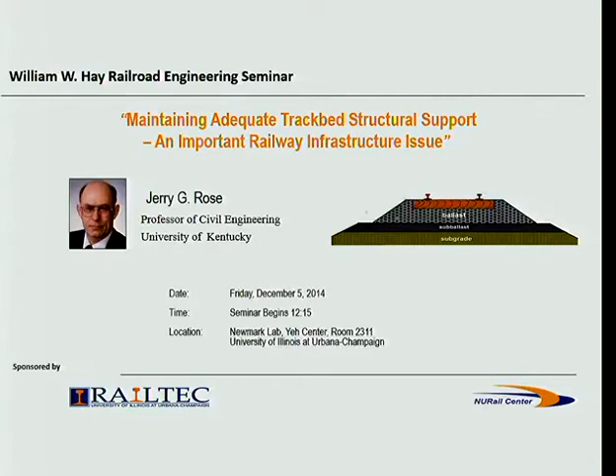I asked him to autograph my textbook. This was $37.50, the bookstore price. I should have bought several for investment, but I didn't. I added the date to it there, but I've always appreciated his...

It's really unfortunate in some respect for you young folks to not have had the opportunity to meet him, because not only was he a nice fellow, nice person, but he was a very interesting person to talk to, and a lot of that was based on his experience, which he had done about everything you can imagine in the railroad industry, on the engineering side.

He was quite an inspiration to many people. He sort of kept the torch burning. As you know, in the 1950s and 60s, the railroads were pretty well on a downswing, at least in hiring engineering folks. But in the 70s and 80s, with the 3R Act and the 4R Act and Staggers Act and so forth, he also saw the upswing, which we're still in, of the industry. So that was his contribution there.

But with him, the railroad industry was number one, and you weren't with him very long until you realized that.

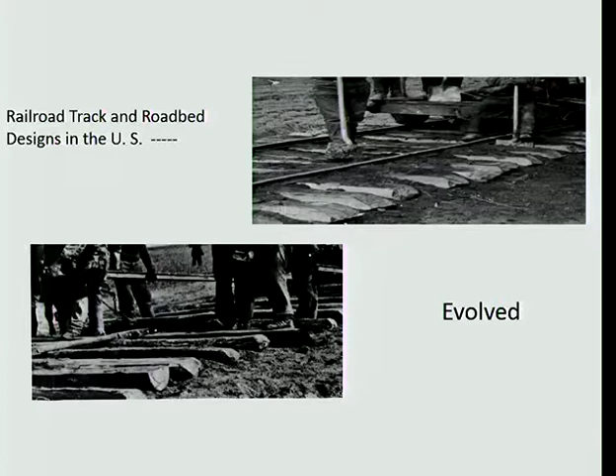Initially, railroads in this country were pretty well just built on the natural ground, and if you were in an area that had fairly stable soils, the more granular soils, probably the performance was a little bit better. If you're in the clay soils, probably not so good, particularly in wet weather. But our track bed system for most of the mileage in this country really developed in the 1800s, well before the highway industry, which really didn't develop very much until around 1910. So up until that time, the railroads were the dominant form of transportation and led in the development of these sorts of things.

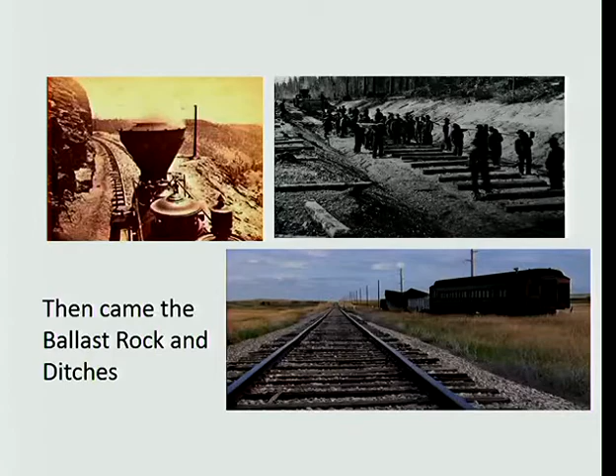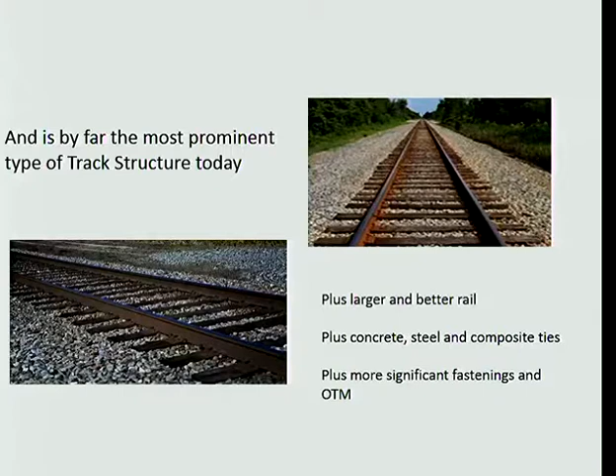So basically the track was laid on the natural ground, and that's pretty well what you had. Then later came ballast rock. It was pretty obvious that if they added some more granular material, ballast-sized materials in and around the ties and under the ties, and gave attention to drainage with ditches and so forth, they would get even better performance. So the all-granular track bed, road bed, evolved from that. Today it's by far the most prominent type of track structure in this country and most other countries. Of course, a lot of advancements have been made - cleaner steel, bigger rail, better rail, plus concrete ties, other types of ties, improvements in fasteners, other track materials, as the industry has progressed.

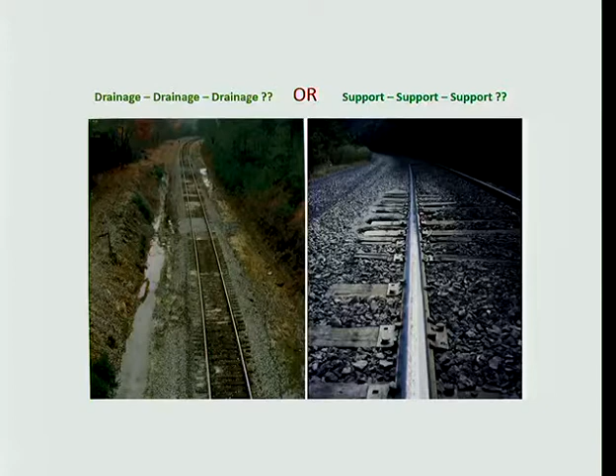Still, the problem of drainage exists. It's typically been said the three major problems with track are drainage, drainage, and drainage. It's interesting - I read an article in a 1927 issue of the L&N Employees magazine, written by a roadmaster, titled 'The Importance of Track Drainage.' His basic premise was that if we can maintain a hard pan, we can hold the track. That was the terminology at that time. I think what he was saying was that we can maintain the geometry to the level we need if we have proper support, or a hard pan, within the track structure. Obviously drainage assists in doing that, but the key really is support and providing the necessary drainage to make sure that support is maintained.

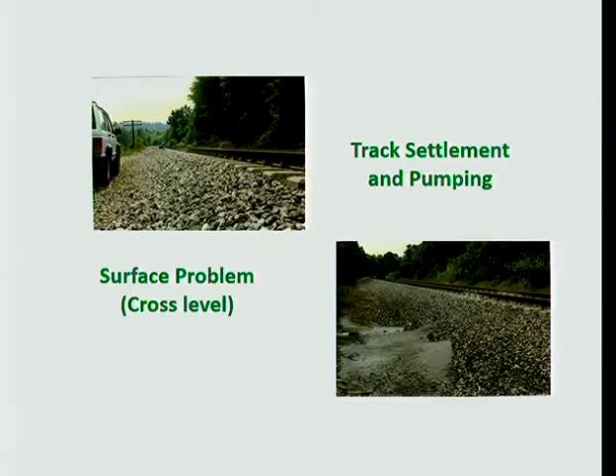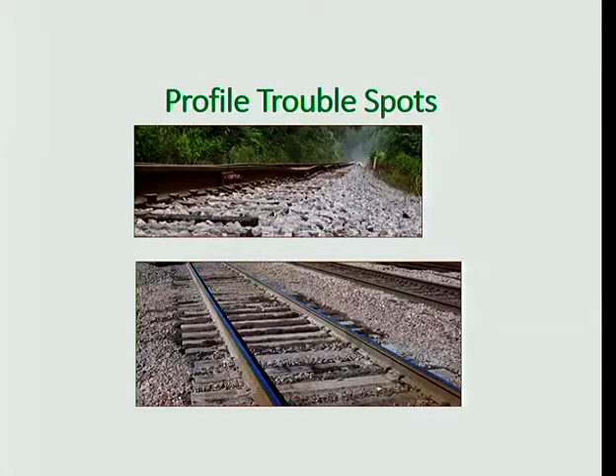Some of these are extremes, just to make a point, but periodically these things do happen. You get surface problems, cross level issues, track settles, pumps out. Obviously if all this material pumps out, the track has to drop, and you may get cross level problems as well as surface problems. Then profiles develop, and wear and tear of the ties, abrasion of the ballast and ties, increases as well. That's not something you want. These examples are not typical - they're not prevalent necessarily, but occasionally they do occur.

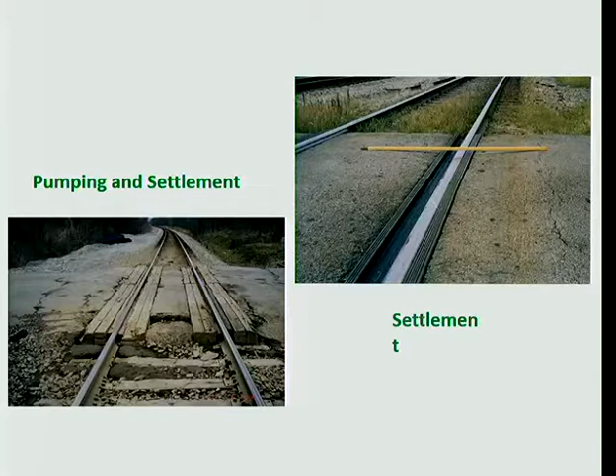Here's an example on a road crossing. The one on the left looks pretty bad - that picture was taken several years ago. But on the right, this crossing is just as rough for the driver as that one that doesn't look so good. You can actually see here the tension crack where the settlement has occurred. So this has settled, and that's just as rough really as the other one, although it looks better. But the problem here is settlement, no question about it, due to the truck loadings and the rail loadings and so forth.

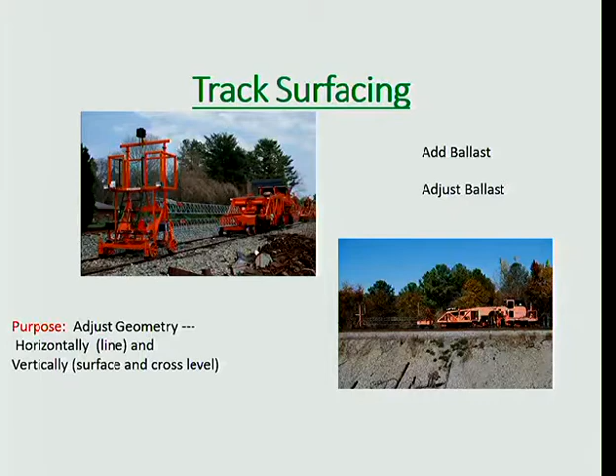So as you all know, the solution to all this is to come out and surface the track, add ballast, adjust the ballast. You're really adjusting the geometry to bring it back within the requirements prescribed for that particular class of track. That's a process that's repeated over and over - you bring the tampers out and consolidate, pull and push, and so forth until you get the track back to the required geometry.

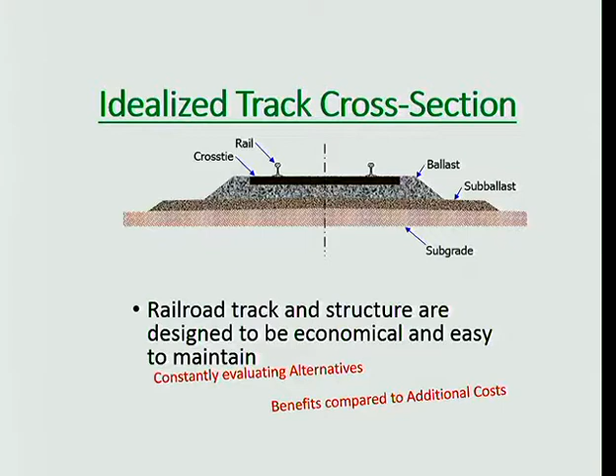The idealized track cross-section would look something like this, with components like the ballast and subgrade, typically designed to be economical and easy to maintain. Those are certainly desirable attributes. What the railroads are doing is constantly evaluating alternatives. Normally these alternatives are more expensive, and the question is whether or not the additional costs are justified. That's generally the bottom line in the final analysis, along with how much interference from operations is required for various solutions to certain problems.

Basic requirements, of course, it's a guideway and support the loadings. If you have a good quality track that maintains the geometry required for that class of track, then all these other things will be dictated by that track quality. Those are the ABCs of what you want.

It dictates the permissible wheel loadings, which is pretty well set, and the safe speed, trying to maintain the geometry over a period of time to minimize the amount of maintenance that has to be done. The overall safety is tied to speed and the dependability and efficiency of operations due to track work that inhibits train operations.

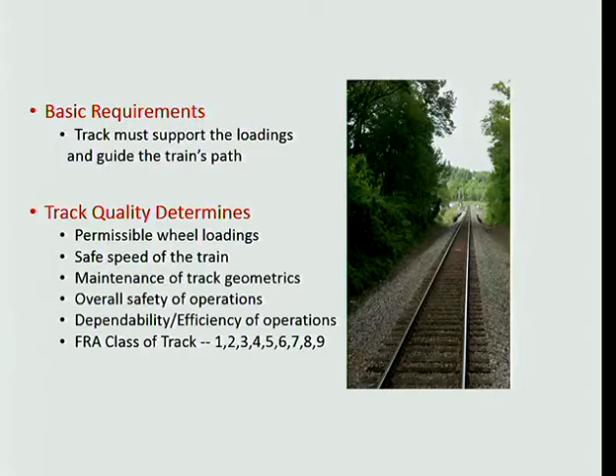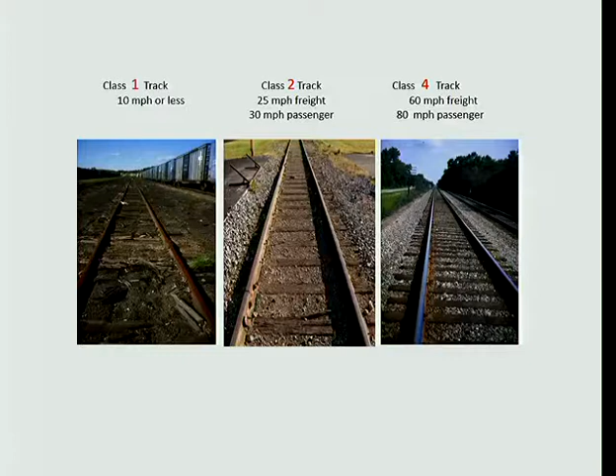So all of those are ultimately dictated by the quality of the track and how well it maintains its geometric features. Whether or not you've got a Class 1 track or a Class 4 on up to Class 9 will be dictated by the safe speed for those particular geometric features. So that's the way it goes.

Now, talk a little bit about the track functions. I have a number of notes here which I always forget to look at, to make sure I don't leave out anything. But let's talk a little bit about the track functions, and then we'll get down to the track bed.

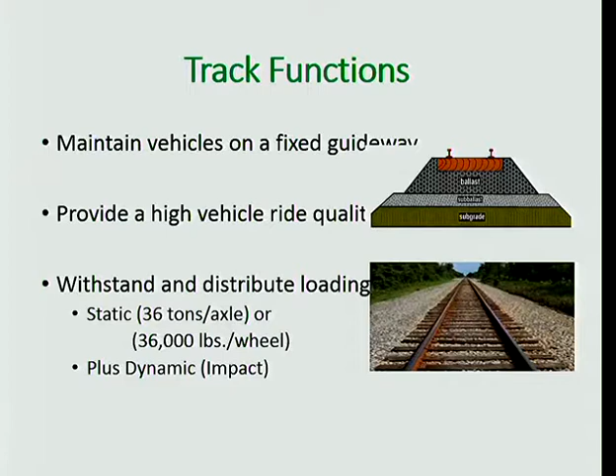Basically, maintain vehicles on a fixed guideway, provide a high level of vehicle ride quality, and withstand and distribute the loadings, as we've talked about. In this country, typically that's a 36-ton axle load that has to be accommodated, plus whatever dynamics that we have.

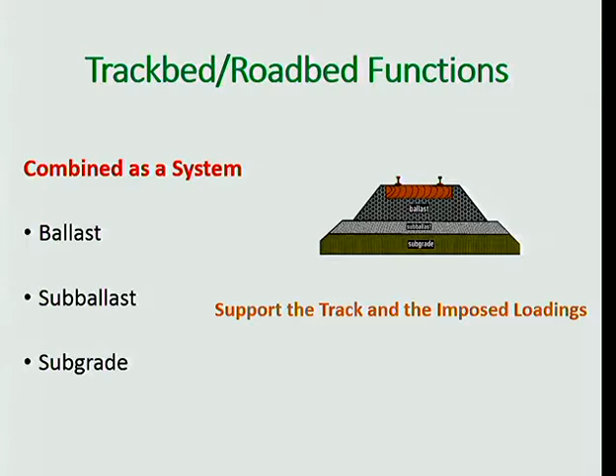Now the track bed, road bed, is a little bit different. This is a system. You have three materials here, primarily, that support the track and the imposed loadings, and they all have certain characteristics that they have to impart to the track structure. We're going to talk about each of those briefly as we go into them.

Actually, I like this picture. I got this from some notes, I think, from the University of Illinois, and I added some over in the red, but the components do not function independently, basically.

It's a system, and each layer is designed, for instance, the ballast to protect the subballast, to protect the subgrade, basically is what it is. Each component contributes certain attributes to the track, and it is a system. It has to be analyzed as a system.

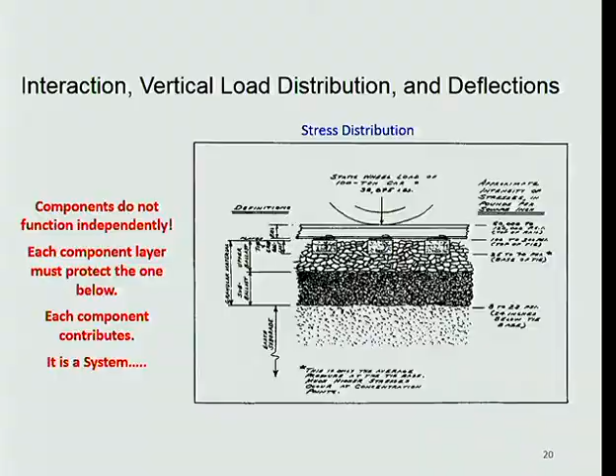For instance, the ballast, what I'm mainly concerned about here, is to distribute the loadings with decreased unit pressures down to the subballast, as well as support the track, and my definition of track is the ties and the rail. Then you get down to the track bed and road bed, and it serves to drain the track.

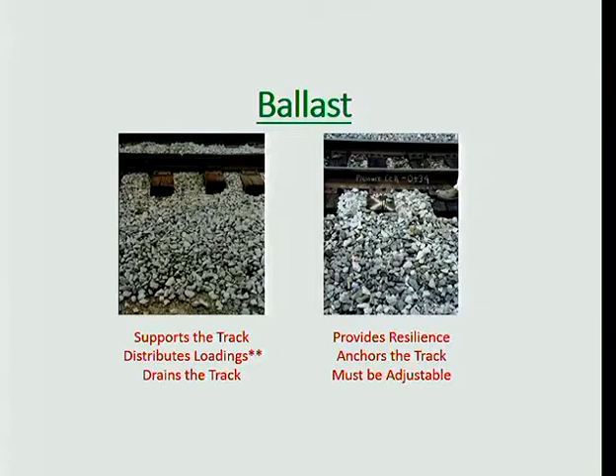These other three are very important also, not necessarily from a structural standpoint, but they're desirable attributes. It's got to be adjustable so you can move around to adjust the geometry. So ballast is very important, serves many purposes.

Then the subballast is a little bit different, more like a highway base mix, as you know - fairly watertight, it will compact very tight and dense. Now it supports and confines the ballast, so we've got this confinement term here. We'll talk more about that later.

It distributes the loadings to the subgrade with diminished unit pressure, hopefully within the bearing capacity of the subgrade. It's a separator and a waterproofer. So it has some very important attributes or characteristics as well.

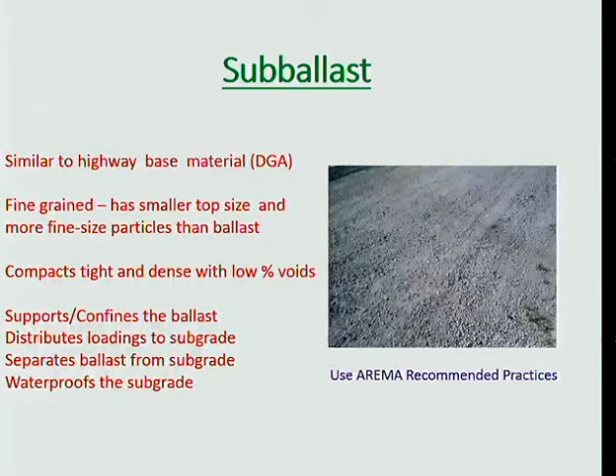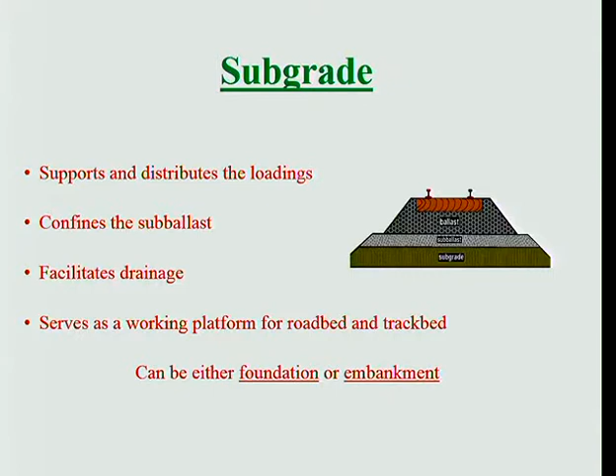Then the subgrade supports and distributes the loads imposed by the subballast and confines the subballast - we've got this confinement term again here. It facilitates drainage, hopefully to keep water from saturating and soaking, and serves as a working platform for that. So each of these materials and layers has several different attributes to do that.

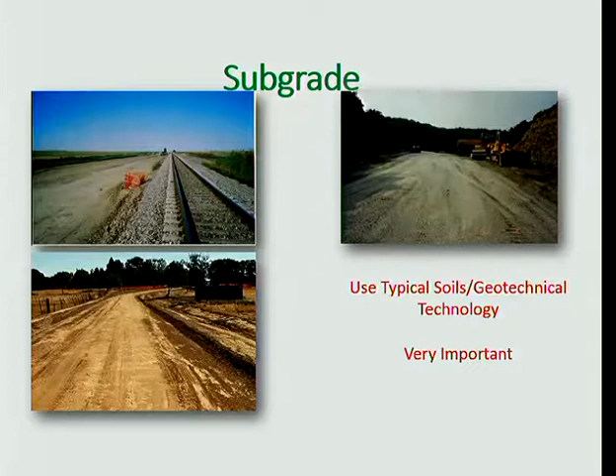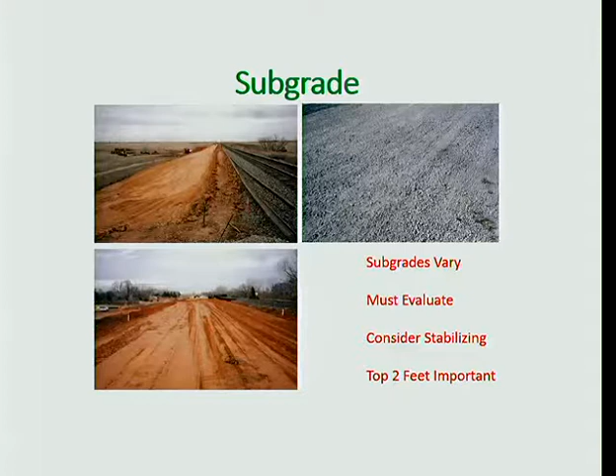Of course, just a little bit more on the subgrade. Fairly simple, borrows a lot from the highway industry as well, but typical soils, geotechnical technology is used. Soils vary a lot, the native soils where you are, and they have to be considered. You have to evaluate, maybe stabilize, and certainly the top 2 feet would be the most important, where the pressures are the highest, just below the subballast. So subgrade is important too, and it has certain characteristics to apply.

Now we're going to change here a little bit. We'll get into structural design very briefly of tracks, and we'll discuss one that I'm fairly familiar with.

What we started with was basically a trial and error type thing. We start on natural soil, we add some ballast, we get better performance, and so forth. That's trial and error based on experience. Then once you get enough of that experience, at some point this sort of leads into an empirical design based on past experiences, trial and error, and so forth.

And then maybe we come on up and get some measurements. We actually go out in the track, get some measurements to sort of confirm what some of our trial and error results have been, maybe take into consideration materials properties. And now we're getting into a pure empirical, and maybe bordering on, a rational method of design.

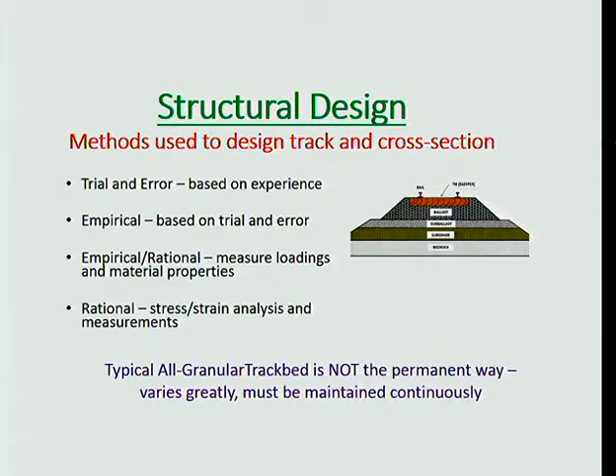And then if we have a program where we can actually calculate the stresses and strains at different interfaces and so forth, then we do have a rational method. And ideally, we can blend this rational measurements and calculations actually back into measurements, and then we've got a proved rational program, which is as good as, the ideal situation to have.

Track design is actually contained in Chapter 1 of the AREMA manual, Roadway and Ballast, and it's largely based on the Talbot method, which was developed here at the University of Illinois. Back between 1918 and 1940, Talbot and his committee, a combined ASCE-AREA committee at that time, studied trackbed designs. They instrumented many track sections with all kinds of levers and dial gauges and everything else they had at that time.

Of course, this greatly preceded computers or anything like that. But at any rate, they came up with some findings. We're going to discuss those very briefly here. But obviously, from a pressure distribution standpoint, now we're going to talk about stiffness just in a minute, but we'll cover pressure distribution first. Two different things, totally different really in their application.

But at any rate, obviously, you must determine the allowable loads, like in any other structure, and what the actual will be, and you compare and adjust. Then you either make them stronger, make them larger, whatever the units are, the layers or the members or what have you, considering the materials properties and thicknesses and so forth, and make a structural design. Well, that can be done in track beds. We're going to talk about that a little bit.

As I said, most of that was done early on by Talbot and his committee, and they idealized these beam-on-elastic-foundation type systems. Since that time, there are some computer systems, a combination of finite element and layered elastic analysis, that have been developed to analyze track beds as well, very similar to the highway industry.

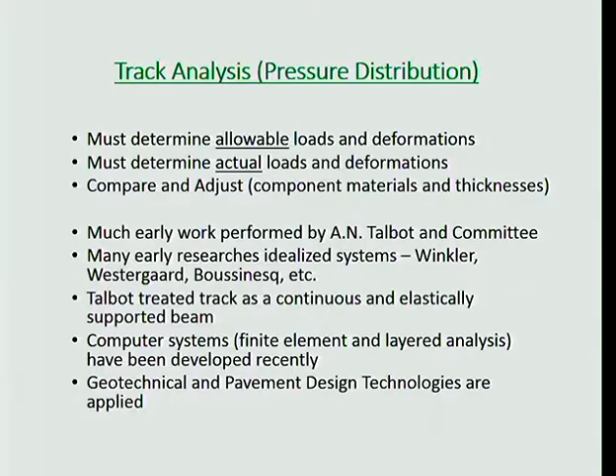This is sort of the overriding equation that came out of the Talbot work, and it was an empirical equation that related the pressure at the subgrade, which is P sub C down here—which would be on the subgrade right here, the vertical compressive stress—as a function of the pressure P sub A directly under the tie, and the thickness of the ballast, which would be probably combined here, and those were the relationships.

So if you had a limiting value here for the subgrade, you could calculate what this load was based on the wheel load and the impact under the tie, then you could relate those two, and basically get a thicker section, which would be a thicker ballast section. I've never known why they called it H rather than T, but that's what they did. Then basically your only option is to increase your granular layer thickness—that's basically the design.

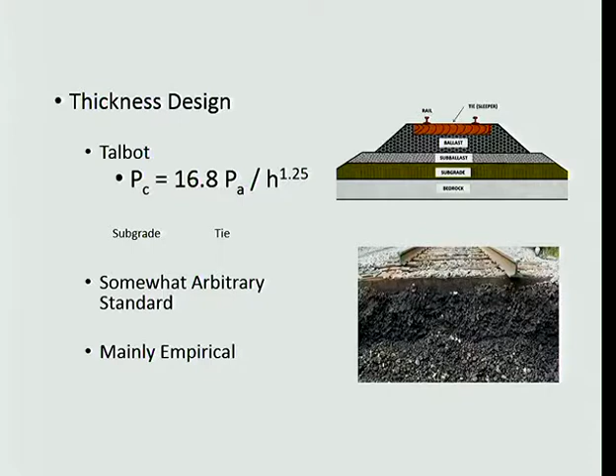Of course, obviously if you dig into a lot of track beds, you don't have a layered system. It's a mixture of ballast, degraded ballast, soil, coal, you name it—that's what's in the existing track. But keep in mind these tracks evolved over a period of years; they were not designed. Now they're not all nearly this extreme, but they can be. But regardless, even if you have clean ballast for a short distance and then it gradually degrades or becomes finer and finer, it's hard to get the absolute separation here in order to analyze this from a rational method. You really can't do it. And that's the main reason why it hasn't been done very much in the past from that standpoint.

This is basically just a little more detail on that, and I won't spend much time here, but really what it says is—and I'm sure those of you who have had the track design course here have gone into this—on a given tie, you're going to have two wheel loads, and you convert those to a dynamic loading, which is basically a function of the speed, the way the system's set up. You divide that, assuming 2/3 of the bottom of the tie is in bearing, and then about 40% of that load is going to be on that one tie, with the other 60% distributed on another 8 or 10 ties either side. So basically you assume 40%, and typically guidelines are that it should be less than 65 psi, or 85 for concrete ties.

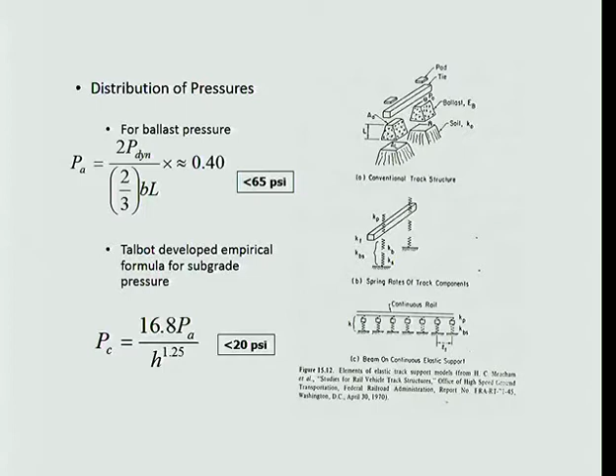And generally, for a given wheel load, 36,000 pounds, it'll come out very close to 65. Then you plug that into the equation, and you calculate a P sub C, which is really sort of like the bearing capacity, and that should be less than about 20 psi, with an unconfined compression strength somewhere around 8 psi. So that's the typical design criteria, and it's been adjusted a little bit from what's used.

This is right out of the AREMA book, chapter 1. Basically, this is generally used to calculate an H for a given P sub C and P sub A. Typically, it comes out about 2 feet. So what it says is, on most any track bed on that type of soil, you need at least 2 feet of granular material below the tie, whether that's mixed 12 and 12 or whatever. So that's pretty well the design based on that system.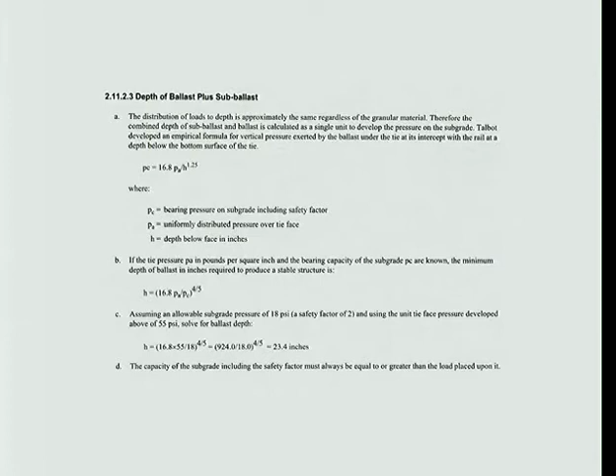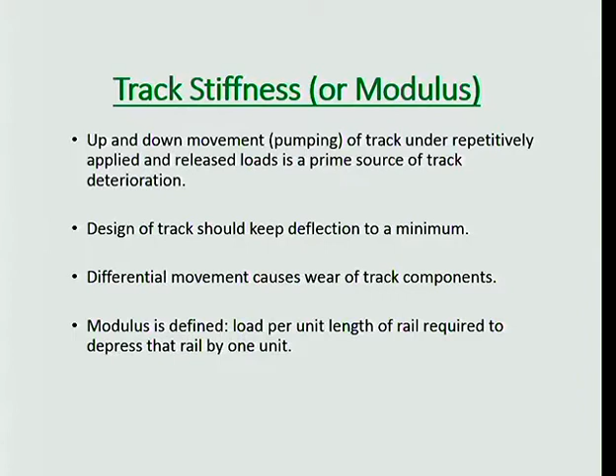Now, stiffness is a little bit different. Here we're calculating stresses in this other system, and that's one way of design. The other way is designed based on stiffness, limiting deflections. You want to keep deflections to a minimum for many reasons, primarily wear of the track components, and that's always defined as the track modulus. Those values are well known - what a typical wood tie track, concrete track, what a good modulus or a satisfactory modulus would be.

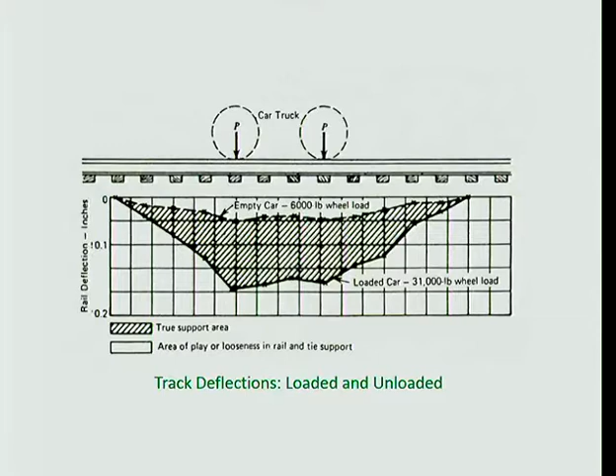And of course, that's basically what you have as the empty or loaded wheel travels along. This is just a moving deflection, from every wheel that goes through there, whether it's 100 miles or whatever. Based on what this deflection is as a function of wheel load, then the modulus can be calculated. And that one's pretty simple to do.

Now, there are some rational methods available. This happens to be the one I'm most familiar with, Kentrack. It was developed at the University of Kentucky many years ago, and it's been through several iterations since, actually back to the old Fortran. It incorporates a good bit of highway design, particularly the failure criteria. In these programs, one thing is to calculate stresses and strains at different interfaces, and the other is to predict service life, or useful life of the system.

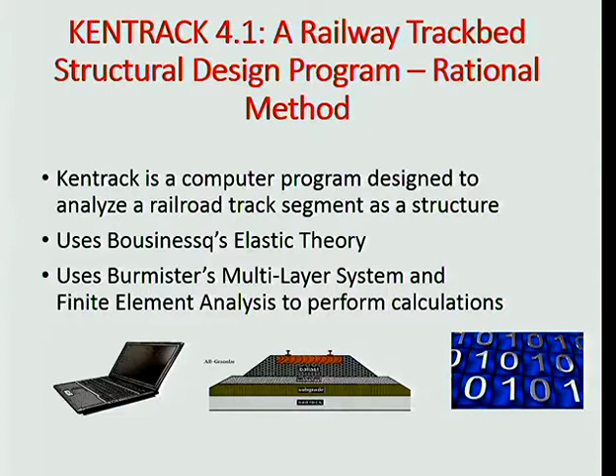So this is designed based on KENLAYER, the flexible pavement design system that's been used for that. I'll give you a little background - it has two steps: one is to calculate stresses and strains, and then predict the design life based on highway failure criteria. We don't have railroad failure criteria, but basically after you get down through the ballast, you've got a layered system down there that behaves pretty much like a highway structure. So that's really what we've used.

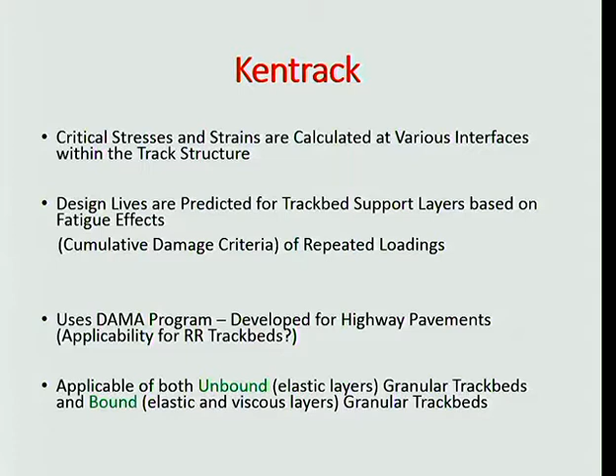It's good for unbound elastic layers, the typical all-granular track bed - ballast, subballast, and subgrade - and other layers can be substituted with various properties, even elastic and viscous, if you have the failure criteria for those. We actually use three different types of track beds: the typical all-granular non-bound material, an underlayment which substitutes asphalt for the granular subballast, and a combination of both asphalt and granular subballast on the subgrade. So it's available for these or many others.

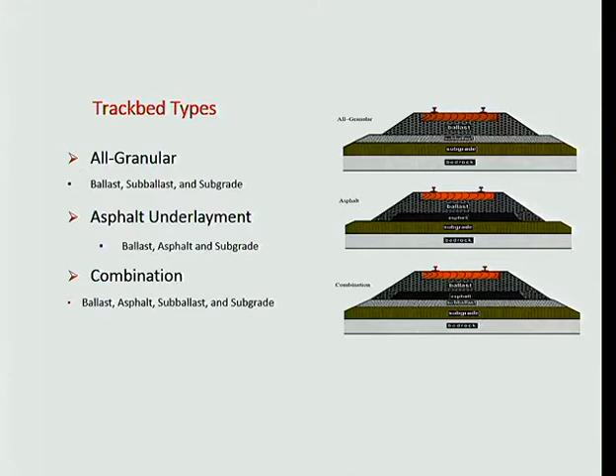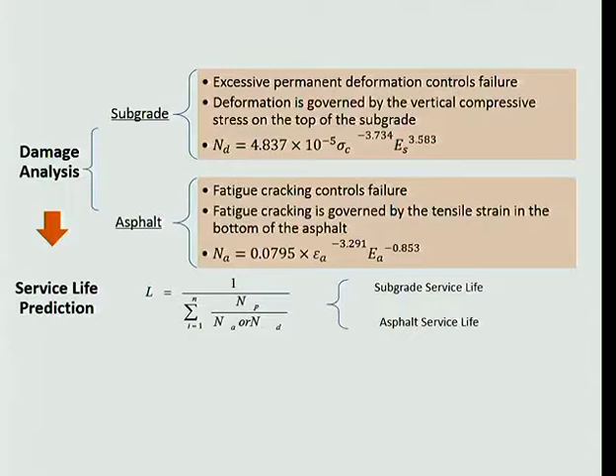The failure criteria then is to add up the number of load applications to failure based on the subgrade, which would be the compressive stress - converted from strain to stress, since that's used more in railroads than the elastic modulus of the soil. Then on the asphalt, it's the resilient modulus and the strain at the bottom of the asphalt layer. So we're talking about vertical compressive stress on the subgrade and failure of the asphalt from tension at the bottom. Then you sum all of these up and determine what the design life or service life would be.

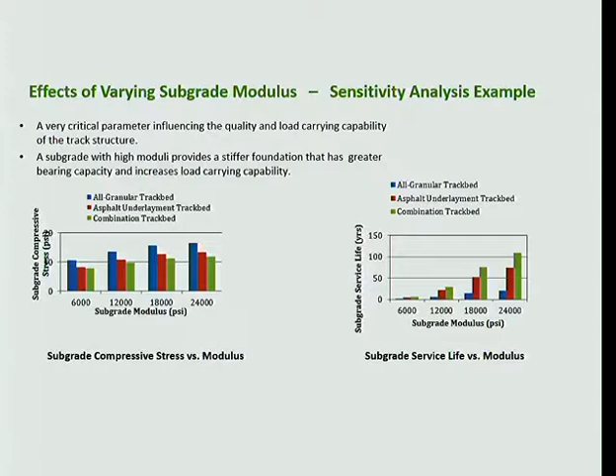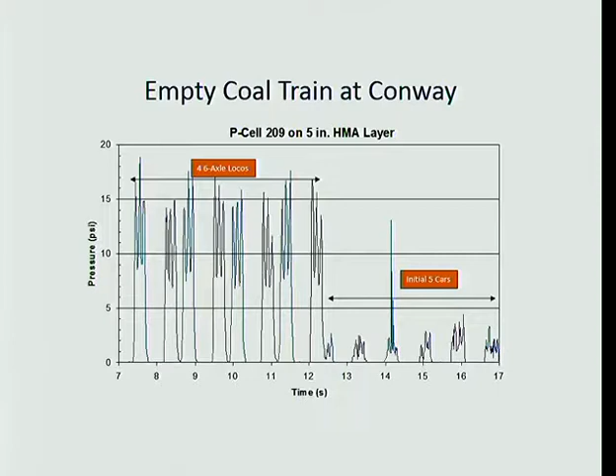That's all I have time to cover on that, but that gives you an idea. These pressures are on top of the asphalt, based on some of our research. You can remember this 15 PSI figure. We're going to get into some European practice in a few minutes. This is on top of the asphalt below the ballast for a typical four six-axle, 380,000 pound locomotives, 15 PSI. These are unloaded cars with a flat wheel thrown in there, but at any rate, those are some values you can expect.

That was on some CSX track down in Kentucky. This was out at TTCI, very similar type structures, and these were the pressures under the locomotives at the top of the asphalt layer, about 15 PSI, and these were under the 310,000 pound cars they dragged behind those test trains, a little bit heavier and a little bit higher pressure too. This was on the subgrade below, so we're down in the range of 7, 8, 9, 10 PSI. You'll see some test data in a moment from Europe, where they have much lighter loadings, down in the 2 or 3 PSI range under the loadings, the high-speed passenger train type loading.

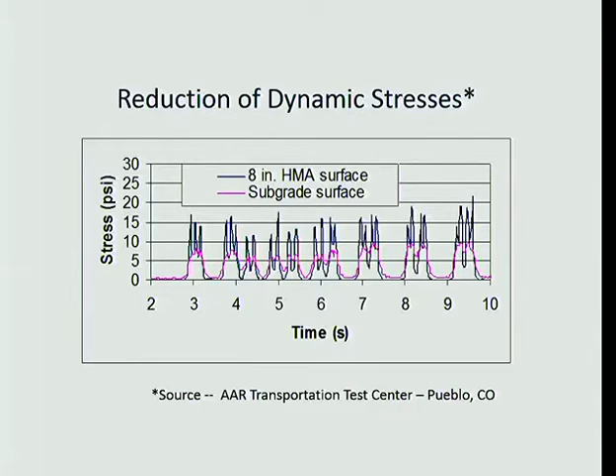We've done a little bit of comparing what we call the KENTRACK predictive values from the program versus the In-Track data, ITD. This is a 10 over 5, 10 inches of ballast over 5 inches of asphalt. KENTRACK predicted 21 PSI, we measured 16, so we're back to this 15 or 16 again. Here was a slightly different section, 22 and 15. Out at TTCI, they predicted for a 12 over 4 section, 12 inches of ballast over 4 inches of asphalt, a thinner section, 11 to 14, and this one's 21, so still not too terribly bad for an 8 over 8.

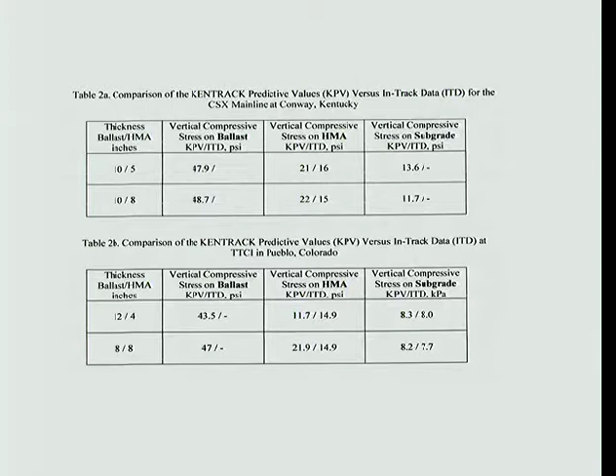These are the pressures down on the subgrade, which they had pressure cells installed on, and they agree very closely with the predicted value. So that's a program that's really sort of proven, you can actually prove it if you have the empirical measurements to back into the predicted values from the program. That's just an example of some of those I thought I'd show you.

Last thing, I'm going to deal with some international applications. I'm going to concentrate on three today, that's pretty much all I have time for: Italy, France, and Austria. So those are the three we'll concentrate on, and this is going to focus to a great extent on the use of asphalt in addition to granular material. A lot of the research over there nowadays is concentrated in that area. Some of this information is as new as the last month, because I was able to obtain some very recent information, interground in here. So I'm going to concentrate on that.

Italy has widely utilized asphalt in structural design on their high-speed lines now for a number of years. Rome to Florence was one of the first ones done, way back in the 1980s, primarily on that. And since that time, it's been used on numerous others.

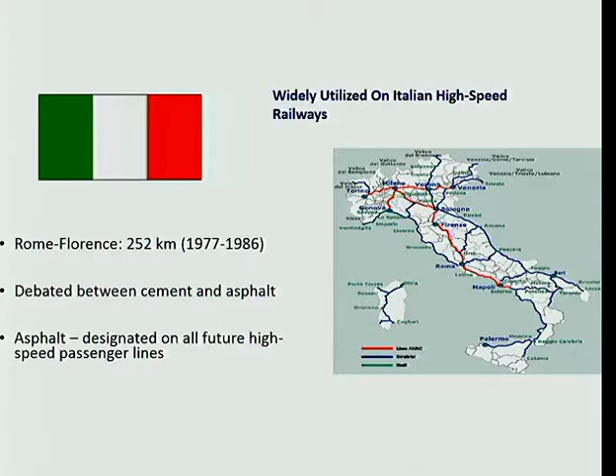These were some of the research findings back in 2000, translated into some of their findings from this type of trackbed construction. This term 'gradually' - I think what they mean here is asphalt is a viscoelastic material, and the vibrations and pressure distributions are basically a little bit different from a purely elastic type material. So that probably is what this gradually means. It's not a real fast application.

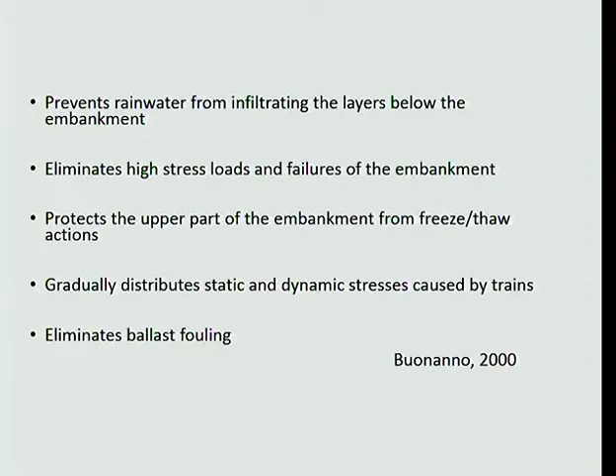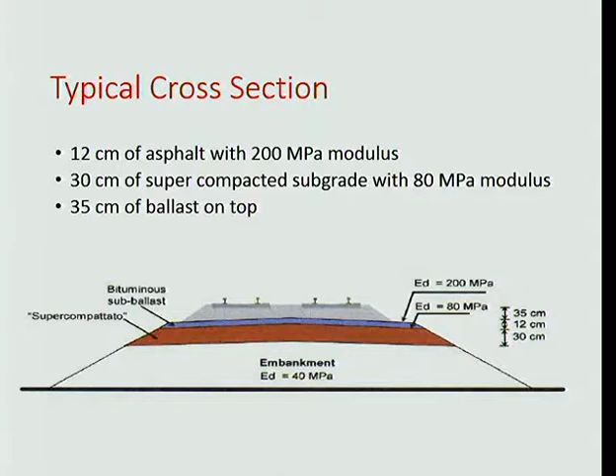Now this is a typical cross section they use, and I want to point out a couple of things here which I think is interesting. One is what they do - they actually define the strength or stiffness properties of their layers to accommodate their loadings. In other words, this is a ballast section here, 35 centimeters of ballast on about 12 centimeters of asphalt, and this is probably a modulus value for the asphalt, 200 megapascals. This is their supercompattato mix underneath there, which is probably a subballast or certainly a very much improved soil, which is 80. And the embankment, which we probably call somewhere here you got a subgrade, maybe they just call it that, 40 megapascal. So the basic difference here is they actually quantify the stiffness values for the various different layers, and then design their system to accommodate that.

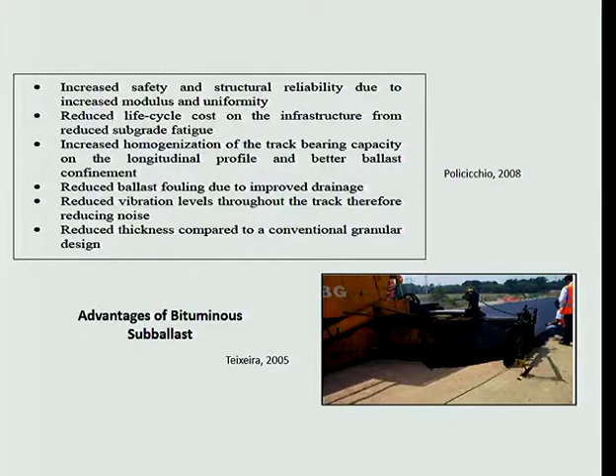So these are some findings from a couple of publications in the 2000s, and a couple more construction slides over here. I actually thought it was interesting - a falling weight deflectometer to assess the structural competency of the roadbed or what have you. And one they're finished over here too. So that's some of the work in Italy.

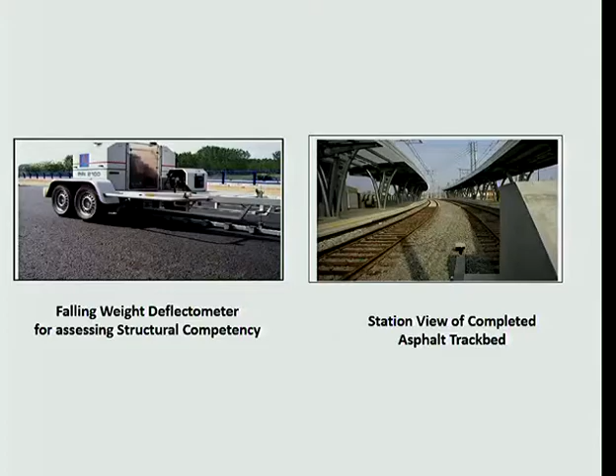Now France - a little bit newer work, but very, very detailed work. In fact, the French were over here summer before last. I heard their presentation on some of the research work that they're doing over there. One of the first ones was the Paris to Strasbourg high-speed line. This was sort of a research project, and 3 kilometers of asphalt subballast was used on that line. Actually, at that time, I think this was 2007 maybe, when they ran this, it was at one time the record-breaking speed for rail on rail. It's been eclipsed since then, but it's still on YouTube. It's just a blur, obviously.

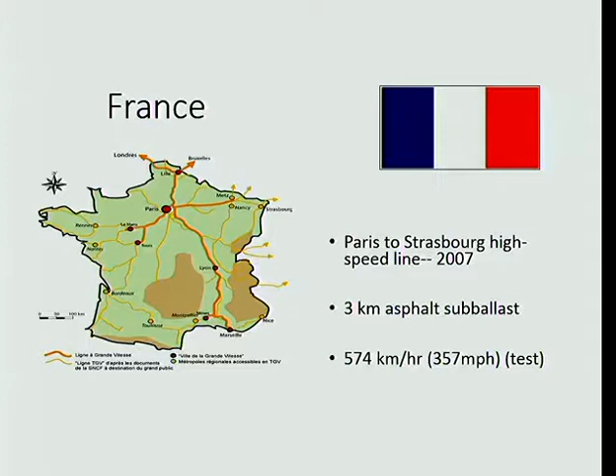I mean, you can watch it, but yes, sir. I'll wager it's the fastest train on ballasted track. Okay, you could very well be true - the fastest train on ballasted track. Okay, yeah, that's probably true. But at any rate, that was part of the history of that, to do that.

This was the test area up there that they did. They inserted temperature sensors, accelerometers on the sleepers, strain gauges on the asphalt and so forth, and pressure cells on the subgrade to monitor these over a number of years. And I've got some test results here we're going to look at, some of which are brand new.

This was the section that they had on the right here. It's a good deal thinner than the classic all granular typical section that they have. This is a layer of asphalt - they call it bitumen still, but that's it there. And then a super subballast, and then on down on the embankment type material. And this is just a...

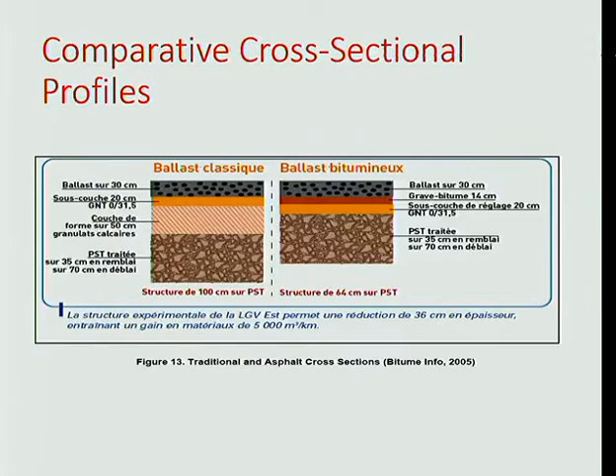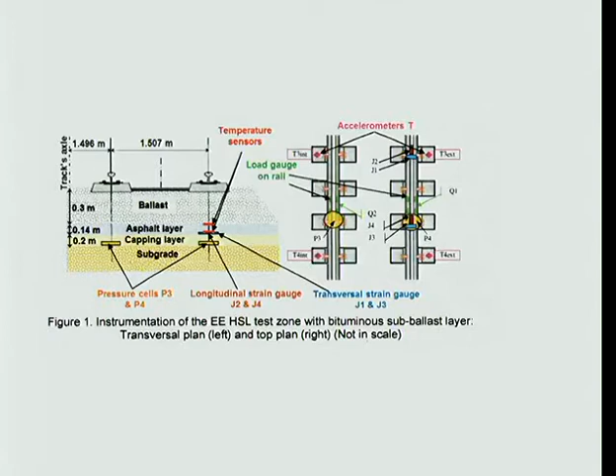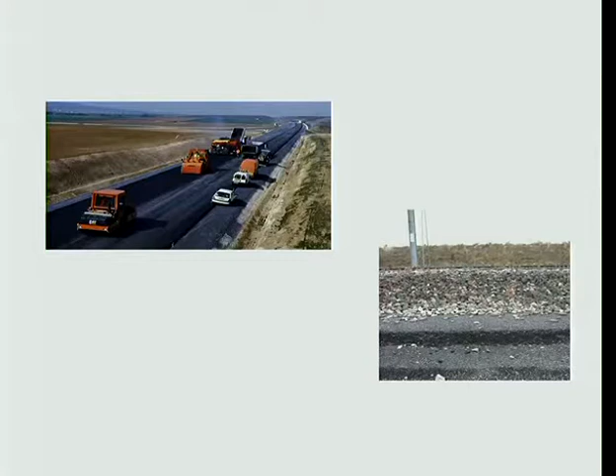Cutaway of some of their instrumentation. It's very heavily instrumented, not only the asphalt section but obviously the classic section as well, the all granular section. So this gives you an idea of some of the testing, and this was again just some of the construction views there of this. You can see the different layers here on the right where they stepped them in as they went up to the track, and some of the construction views as well.

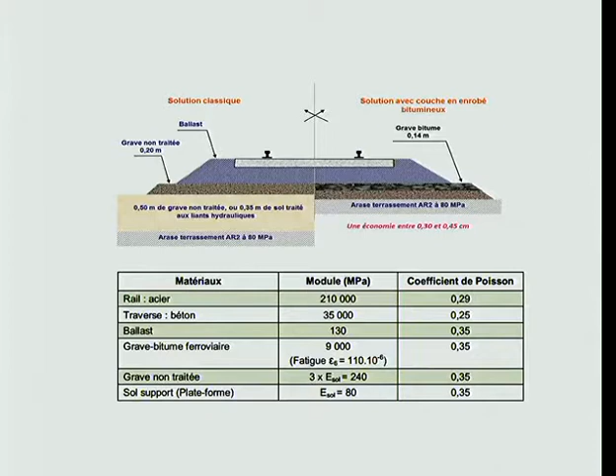And these are just comparing the sort of traditional all granular section over here with the asphalt section here, and some of their - you'll notice this data down here for the 80 megapascals, very similar to the Italy test. So these were the testing we've already gone over. Now this testing has extended past 2011.

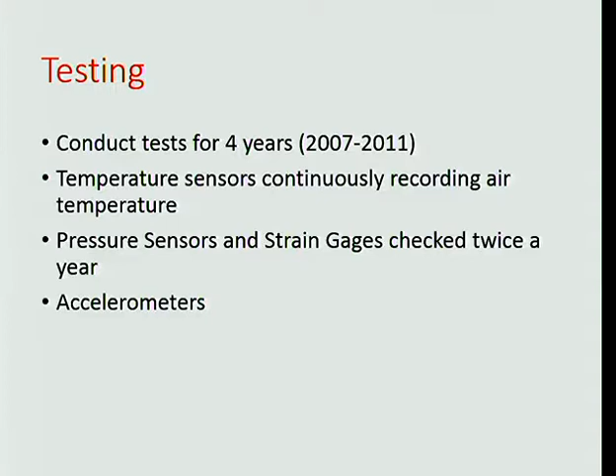And these are some of the findings for that. And this is this year's report here.

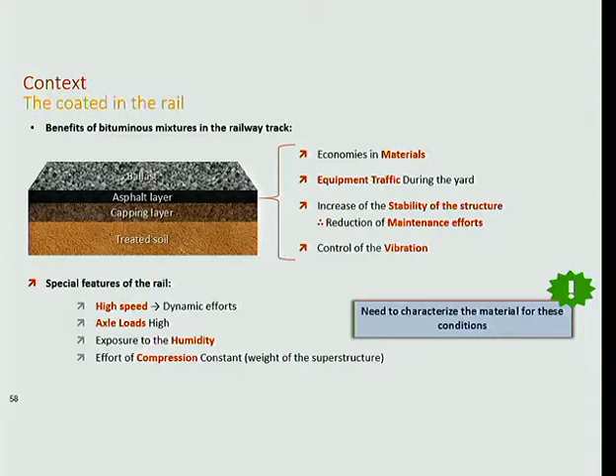But at any rate, the economies of materials, thinner section, you can drive on it, lay track on it regardless of the weather during the period once you get the asphalt down. Increased stability of the structure, reduction in maintenance efforts. I'll show you some data on that in a minute. And control of vibration - I think that's generally due to this viscoelastic layer in there from the vibration standpoint, and some of the high axle loads, high speed, and so on.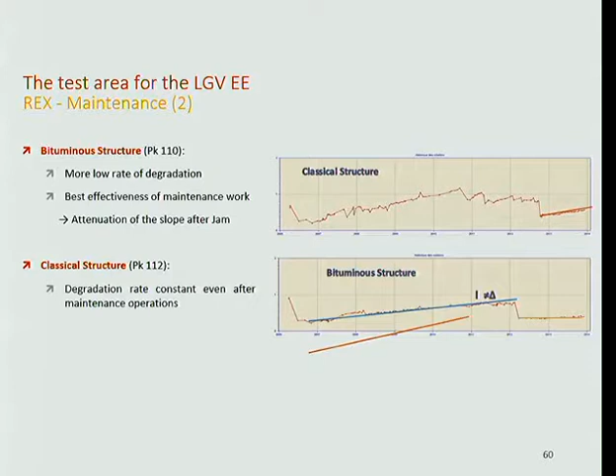Now remember, this is just translated - best effectiveness of maintenance work. In other words, what they do does the job, I guess is what they're saying. And attenuation of slope after - I don't know what jam is, maybe we have someone who knows that. But at any rate, that's the first type of data that I've seen of that type that's been produced out of there.

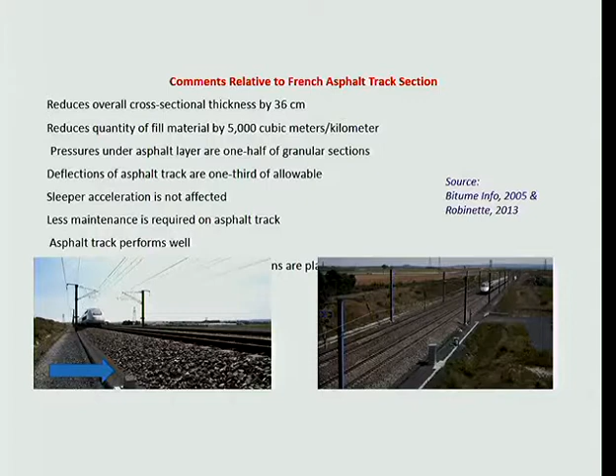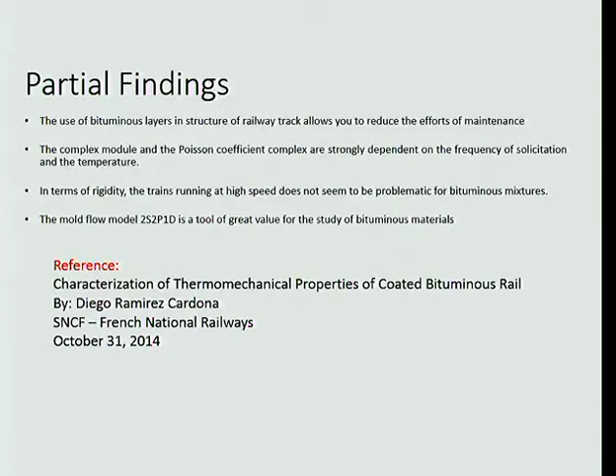And these were some more comments from Robinette last summer when he was here. They basically said pressures about half, and that's still the case. Deflections are a third of the allowable, so reducing track deflection. Sleeper acceleration is not affected - in other words, it's not a whole lot stiffer, but it's stiff enough, I think is what they're saying. Less maintenance required, and I showed you the data for that. And the track performs well, whatever they base that on. Then last month, these are some of the partial findings of their report that has just come out, which are just firmer confirmation of some of those comments.

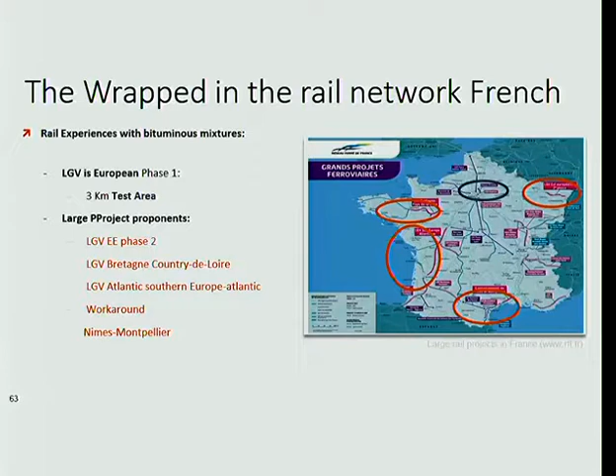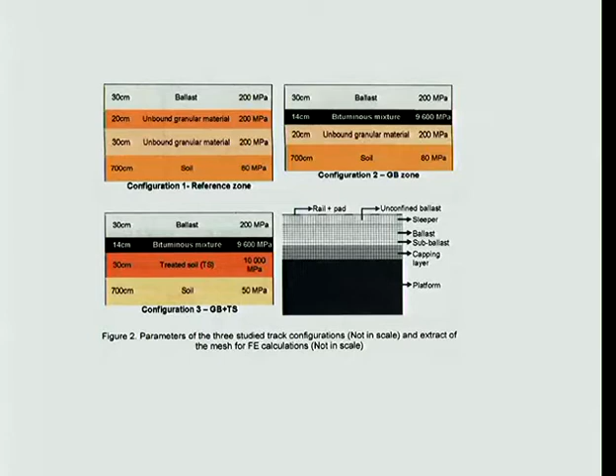And then these are the other track sections that are presently under construction. Some of you may be familiar with France, and you know where some of those are - I'm not. But at any rate, these are scattered around and presently under construction, based on the research findings on the one we just talked about. And they're also looking at two different designs: this is the unbound granular material, which is the typical subballast, and this is a treated soil that apparently they can increase the quality and bearing capacity of to equal probably this. So we have an alternate design for that.

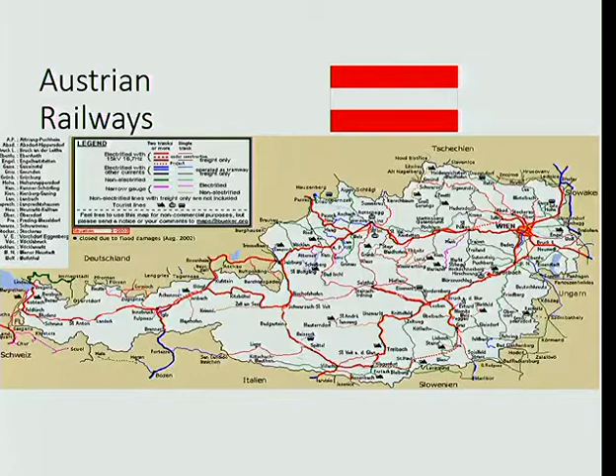And then the last one is the Austrian railways, and this is pretty brief, but of course that's a small country. They have been implementing asphalt layers for a number of years, going back to the 1960s, as you'll see here. These are some of the advantages they point out: the drainage effect, avoiding pumping, and again you get back to this homogeneous and providing a consistent load carrying capability for the track. What really that does in the final analysis is there's less of this galloping as you hit soft and hard spots. So you eliminate that, and you get a smoother ride, I think, is really what that is.

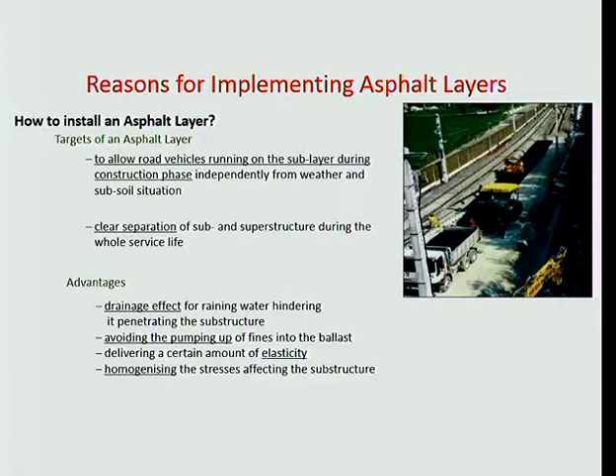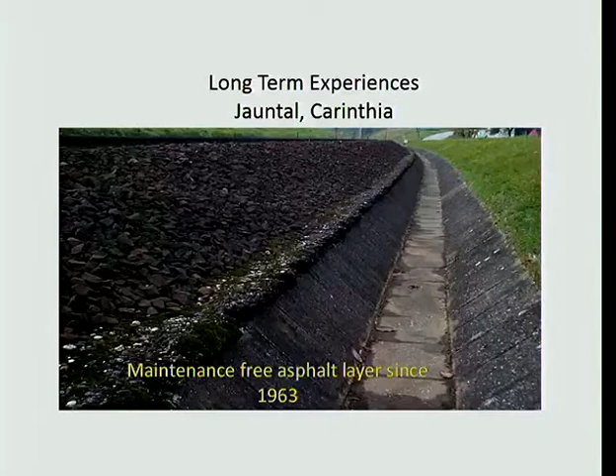Here's one that went in, I think this was 1963, in Austria, and they say maintenance free. I don't know exactly what all that means, but that's what the report said. At any rate, Austria, and some of their conclusions are very similar to others we've talked about: the quality of the track, clear and long-lasting separation, layered systems between the superstructure and subgrade, therefore you can design based on that.

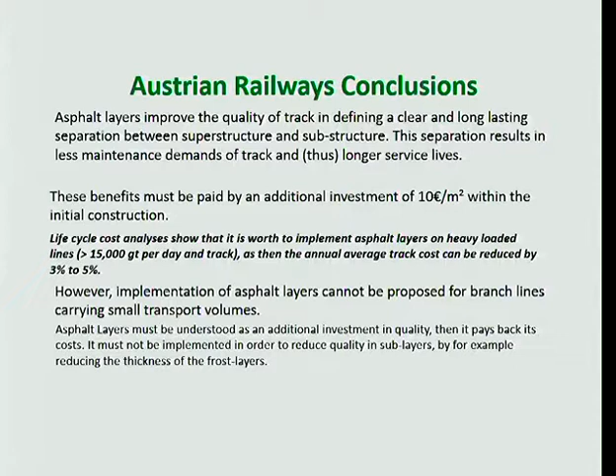It's an additional investment, obviously, so many euros there I guess. And on branch lines you probably wouldn't be able to justify that. But the way they review it is it's an additional investment in quality, then it pays back its cost and so forth, on and on. So these are some of the findings from Austria.

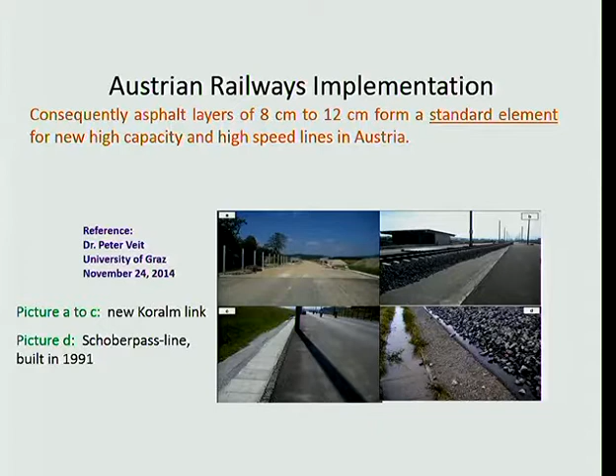This is the very latest I just got from Dr. Veit over at the University of Graz. Asphalt layers form a standard element of all new high capacity and high speed lines in Austria. The one on the right here has been in since 1991, and here are some others that have been in. All right, a couple of slides of concluding comments here, and then I'll be finished.

The majority of railroad track bed and roadbed designs in the U.S. basically evolved over a period of time. I don't think there's any question about that, based on later empirical measures. Essentially all granular support layers. Periodic maintenance, surfacing of the track, is necessary, has been for 180 years, to maintain the required geometric features, which in the final analysis affects the safe speed and so forth.

Each track bed support layer provides specific qualities to the track, and combined they are a system that has to be analyzed as a system. Computer systems can be used to design and analyze layered track sections and structures, if you can identify the properties of each layer and the thicknesses. If you have failure criteria, then you can actually predict design life or service life as well.

Of course, Kentrack can be used here, and using the relative effects of various layer compositions, properties, and thicknesses, sensitivity analysis can be used to study the effects of wheel load, subgrade support, thickness of ballast, properties of the asphalt, thickness of the subballast. All those things can be evaluated.

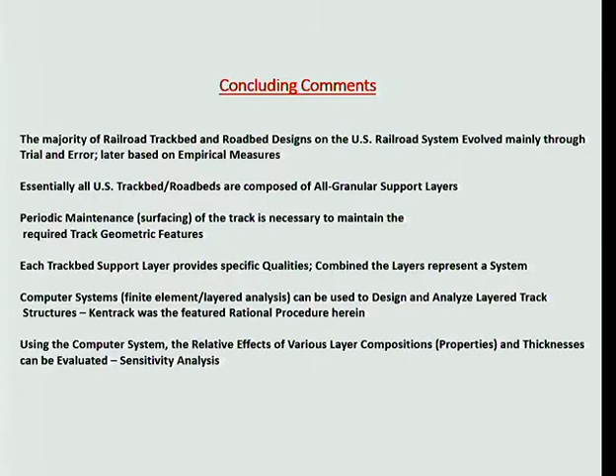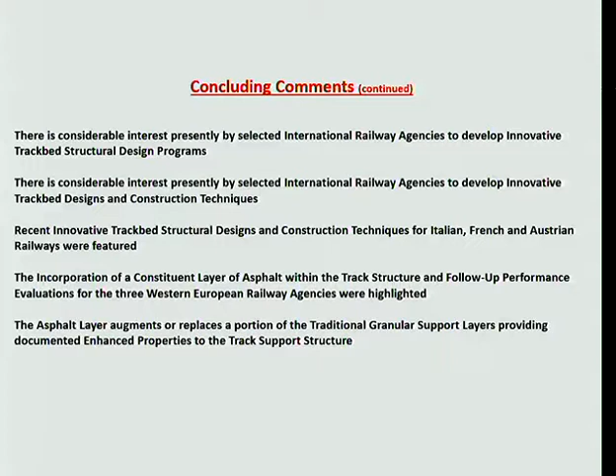Also, there's considerable interest in selected international railway agencies to develop innovative track bed structural design programs and to develop both the programs, designs, and construction techniques for that. We've featured three of those from three countries here: basically the incorporation of a constituent layer of asphalt within the track structure, and follow-up performance evaluations for three Western European agencies were highlighted. The asphalt layer augments or replaces a portion of the traditional granular support layer, providing documented evidence of enhanced properties to the track support structure. So that's some of the concluding comments there.